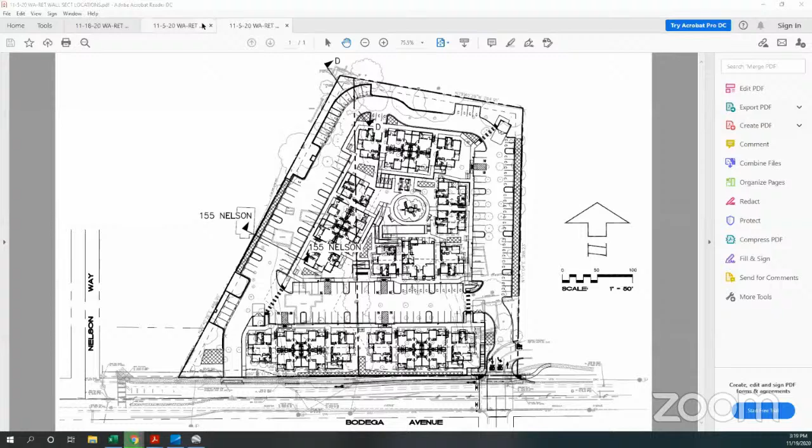Yes, okay. So the soldier pile wall is represented up here at section D, in the upper left-hand corner of the design, the northern corner. I've created this graphic that shows generally how this is constructed. You can see the dashed line at the top is the existing ground surface.

What would happen here, at this location where it says soldier pile wall with wood lagging, is a pier hole would be drilled down to whatever the design depth requires. It's drilled from the surface, no excavation at that point, just drilled straight down to the diameter of the hole, and then you put an I-beam in there.

If you go up to the plan view at the top here, those are I-beams. They look kind of like an H or an I, depending on how you look at them. Those get set into the pier hole, or pier holes in this case, there'd be multiple. Concrete is then poured up to about the location where it says top of pier concrete.

So now if you look down in the hole, you would see the I-beam and you would see the top of the concrete, yet nothing has been excavated at that point in time.

And then you start doing your excavation, and you can see where one of my engineers has thrown in phase 1 ground surface. It's just schematically, you excavate down a foot, 2 foot, whatever is comfortable, and you drop the lagging. You can see up above, this says wood lagging. It can be concrete lagging, there's different kinds, but we just use the word wood here. You slide the wood lagging into that spot.

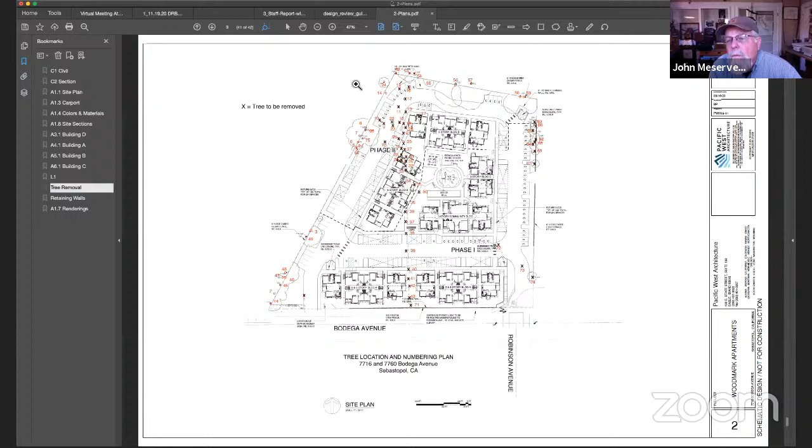So those are all trees in good condition. I didn't find any significant distress or decline. They're vital trees for the most part. We are encroaching some on drip lines, and I'm sure that's going to be a topic here before we're done. But the amount of encroachment, I think, is reasonable.

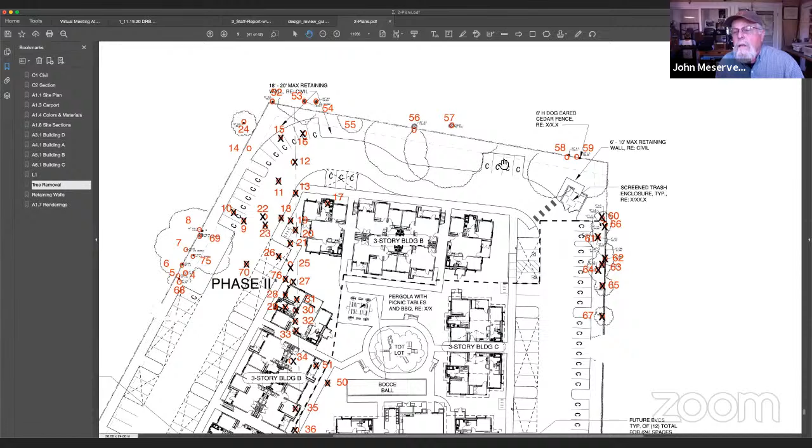I've said in some of my documentation that you might have read - on the two big trees, 56 and 57, I'm calling that a moderate impact. I don't want to downplay the fact or try to convince you there's going to be no impact, because there will be some impact, but that impact will be moderate, and moderate is very acceptable on large, healthy, vital trees. I fully expect those trees to survive and to not have a problem. I can show you examples of trees all over the county where we've impacted to that degree or greater, in Sebastopol, and trees are doing just fine. I can address anything specifically, if there's a specific tree or condition. Happy to do that. That's just a quick overview.

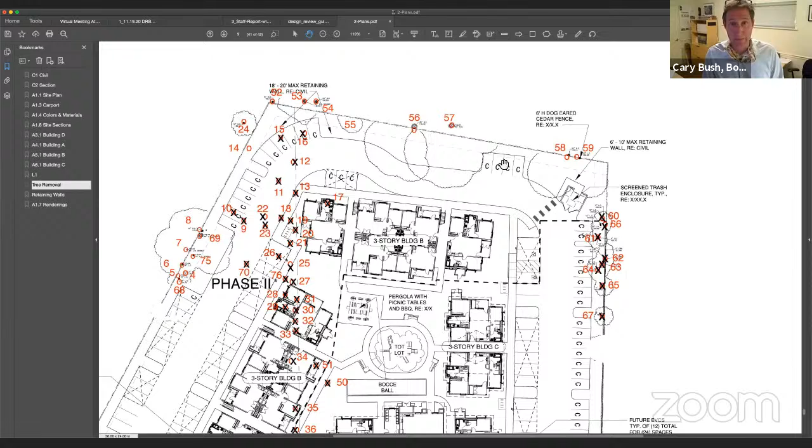That's fantastic. Just overall, just curious to hear your thoughts - 56 and 57 were significant landmarks, and we're just trying to minimize any impact because it doesn't belong to the applicant, it belongs to the neighbors. So we're just trying to understand how that soldier pile wall or retaining wall, how what impacts. No one ever knows once you start digging, but what we may expect, or what you've experienced in your career, and how this relates to the real world.

I love the soldier pile wall. I think that's the best choice there is, short of not putting a wall in at all. It really minimizes the distance from the tree to the wall. I've been fooled in the past by wall locations - they look good, but then there's, oh yeah, now we got to over-excavate for drainage, now we got to over-excavate to get a guy down in there to build a form, and you end up being 2 or 3 feet closer to the tree, which is not what we're trying to do.

So this kind of a wall really eliminates that impact behind the wall, keeps the wall as far away from the tree as possible. So I'm a big fan of soldier pile walls.

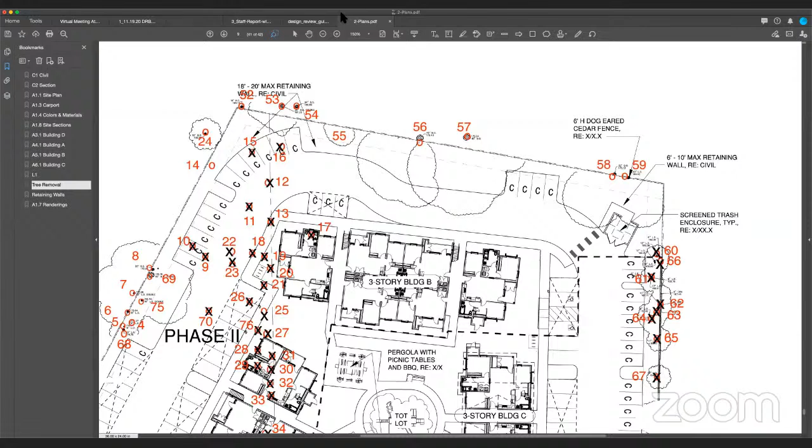In terms of my comments about moderate, I think it's important to consider what trees go through in their lives. They're not protected from the world and from impacts, from pest, disease, lightning, storms, soil conditions. If they're healthy to start with, which for the most part we have very healthy trees, they're very capable of tolerating a little bit of root loss, just like they tolerate canopy and foliage loss when we go through and prune a canopy. There really is not a lot of difference. Roots regrow just like branches regrow.

I think the critical part here is that we don't take too much canopy when we're pruning and damage the tree, and we don't take too much root system when we're excavating and damage the tree. I think we're in that category of, yes, there will be some impact, but the tree should respond just fine.

Great, thanks John. I was just curious, just to staff, is there any observation, any mitigation measures during construction as well as post-construction on the overall long-term health of the trees we're talking about here? Is that for me? I don't know, that was actually kind of more for city staff maybe to carry, if the city arborist would be still reviewing these trees long after the soldier pile walls are in, or maybe that's you John, I don't know, but I'm asking.

I'm going to insist that fencing be in place, that appropriate mulch is placed, prior to starting any work on the site, and that nothing gets behind those fences at any time for any reason. Those would be my criteria, and that should be checked regularly and periodically during the construction process to be sure that it's in place and kept in place through the duration of construction.

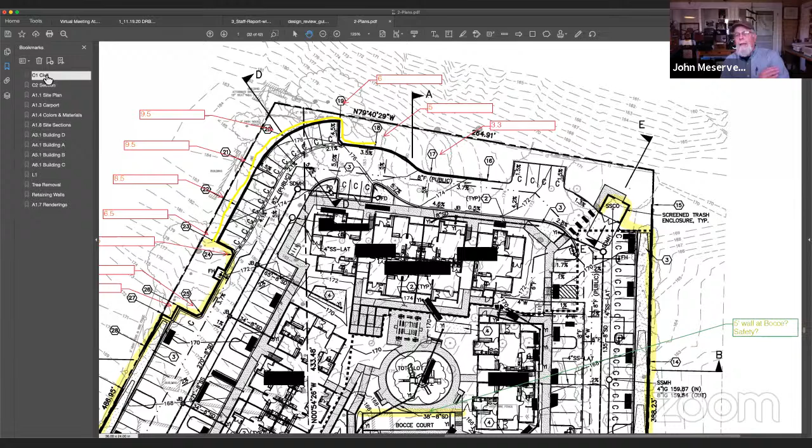Well, of course, if that's part of my assignment, my job would be to keep impacts at a very minimum. You were talking about fencing earlier—typically I see a lot more damage to trees when fences come down and contractors don't pay attention than from approved grading or improved activities near the tree. So that's absolutely critical. Fences come down quickly, so that's an issue. It's got to be in place and monitored to keep that kind of additional impact from happening, which could move from an acceptable moderate impact into something more significant and unnecessary.

Does that answer your question or fill in the blanks there, Cary? I think so. And again, certainly the project could be conditioned to require an arborist to be on site overseeing these critical issues. It could also be part of our tree protection plan. So there are multiple mechanisms to put in place, all with the goal of preventing any harm so that the situation you've articulated does not come to be.

On a slight digression, I apologize—there were a number of questions for our civil engineer at the last hearing, and I note it's 4:04 right now, and he has a hard stop at 4:30. So it's the board's pleasure as to what order they address the issues. I just wanted to point that out since there were a number of questions, and we do have Mr. Dalby available tonight.

Thank you for that reminder. Do we have any more questions for our civil engineer? Chair, if the board doesn't, I do have one at the junction between the trees and the retaining walls. From my own experience monitoring construction projects, I know there are rules of thumb about how many larger roots you can cut and still have the tree be viable. So I don't know if this is for the civil engineer or the arborist, or both—what happens if, as you're excavating down, say at the fourth or fifth board down, you find a number of significant roots? What happens to the project at that point?

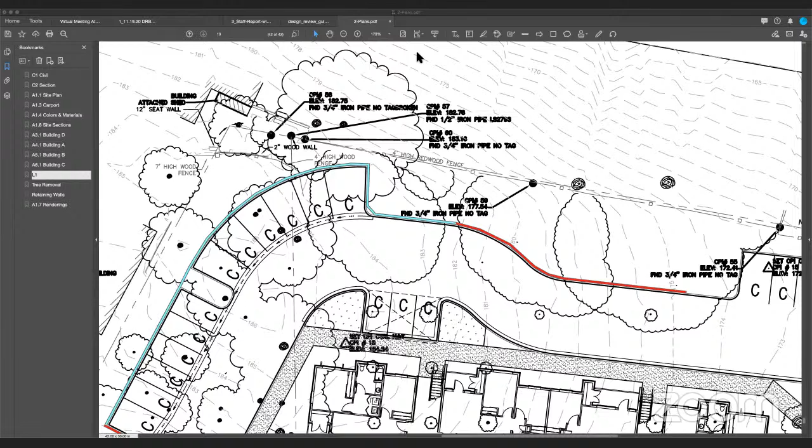Any other questions of our engineer before? Okay, Lars? Looking back at the staff report from last time, there was an overall question about the grading and terracing of the site. Staff has requested on several occasions that the applicant demonstrate why terracing the site is infeasible. Since we have a civil engineer here, we've seen the project go from more dramatic grading to less, and we've heard the explanation of accessibility as to why this is the case, but I just thought we could get the engineer's input on all of that while they're here.

This is Dennis Dalby, Civil Design Consultants. Mr. Langberg, I'll try to answer your question. Terracing the site with our latest plan, the sections shown here don't really show it too well, except section A, where you can see we are terracing the site.

We're terracing the site at the bocce court and at the upper building area. So all of those retaining walls you now see on the site are now taken away from the perimeter retaining walls shown on the plans. We are terracing as much as we can while still meeting our objectives for accessible paths of travel, maintaining 5% maximum on our contiguous sidewalks around the parking, for both parking comfort and accessibility.

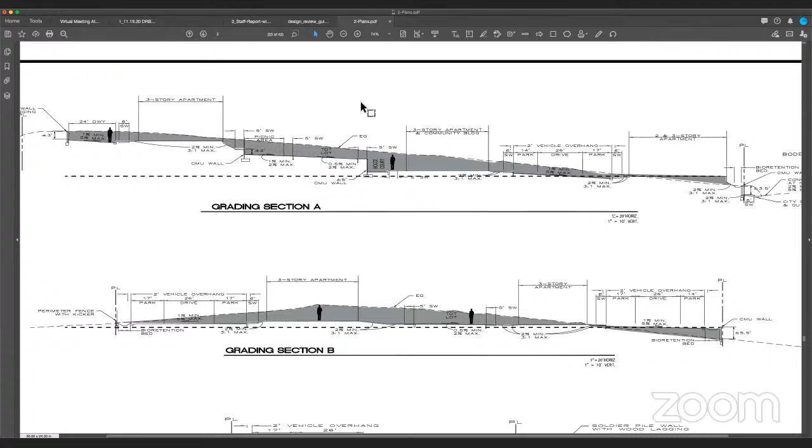Okay, thank you. So that brings up questions again, maybe more for the architect. I don't do this level of architecture myself, so the requirement for this kind of housing complex is that the whole site has to be accessible to every person via 1 in 12 ramps or less. Is that right?

That's correct, and we do have ramps where we can find room for them. Unfortunately, when you've got sidewalks and paths of travel adjacent to parking, contiguous with the curb, we can't get 1 in 12 ramps in those areas. Our 1 in 12 ramps are generally all the ramps you see interior around the top lot, the bocce court, and up to that most northerly building.

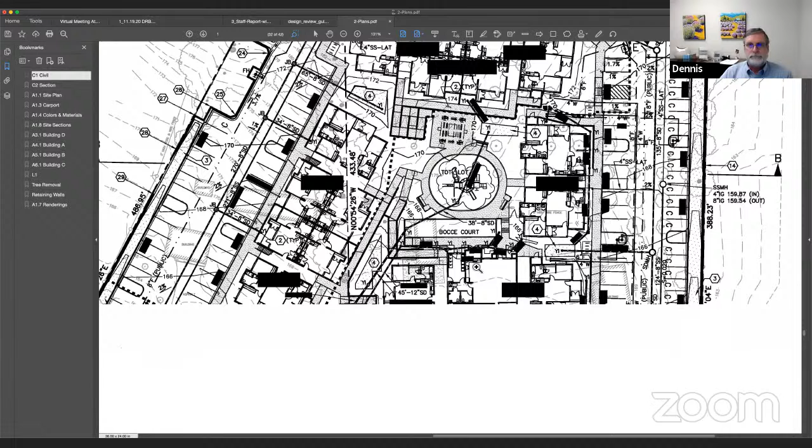Yes, that's not part of the plan, I know. Okay, thank you, Dennis. You're welcome.

All right, any other questions? Can I ask a quick question? Yeah, who is that? It's Chuck Hoffman, I made a comment at the beginning. Yeah, go ahead, I'll keep it short. Yeah, if you can make it brief.

This is very interesting to hear about the concerns about the trees. Is there a committee that considers the impact of the development on the community? I mentioned the traffic, but I'm concerned about the character of the community, given that we are being treated in an exceptionally negative way within the town, within the city.

Yeah, that is what this board does. We are the design review board, we're also the tree board, so community design and those sorts of things is in our purview. What's outside of our purview is things like zoning, densities, and those sorts of things. This board is authorized under the design review guidelines for the city, which are specific guidelines. They're the source of our authority, essentially, and you can see them online at the city's website.

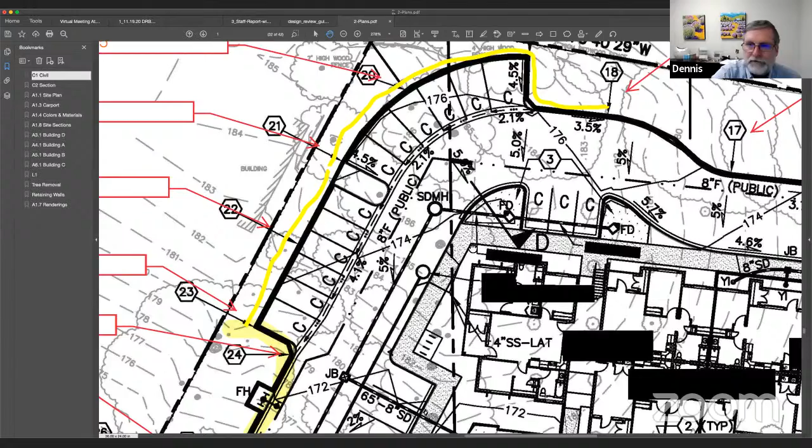So there's bioretention beds right near the planter islands, right where the lower D is on section D-D. Lower D, section D-D, let's see, B, C, D. Right, so yep, there we go, okay. So you've got a little planter island right there in between the parking. There'll be bioretention there. Anywhere you see FD, that's a field drain that drains the high flows that come into the biobeds, so we've got two right there.

There you can see the drainage pattern along the compact parking spaces heading south, and as you go south and turn the corner, there's another compact space. That little hatch pattern, the little dots you see, that's all bioretention along that property line also. Wait, which little hatch pattern? It looks like, from this screen, a dot pattern.

Not this, this is sidewalk, right? No, it's on the perimeter of the project. Oh, here, like here. Yep. And then if you go up, you'll see it along the parking spaces there by 155. Up in here. Yes, correct.

Got it, so you're draining down and then that way. Correct. Oh I see, yeah there we go. That's the correct grade. And there are other biobeds interior that are catching roof drainage and things like this near the tot lot. Correct. So if I understand correctly about this bio drainage, then there's no further drainage from that point.

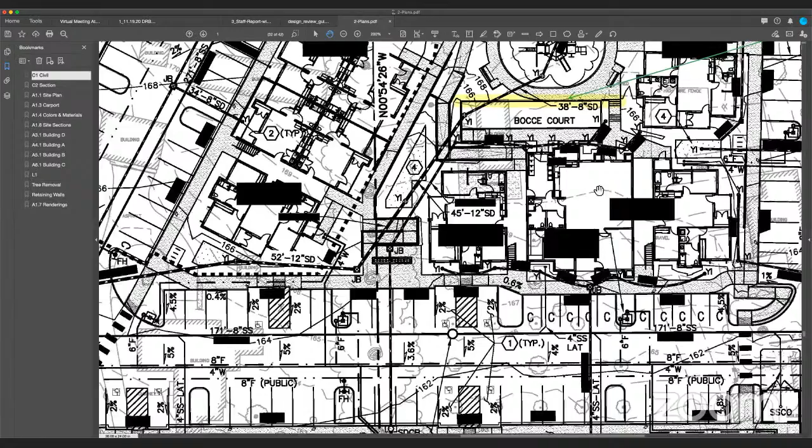That just then goes down to earth. So it's dumped in there. Yeah, so Sonoma County has regulations through the regional board where we are required to capture and treat stormwater runoff for a particular size storm.

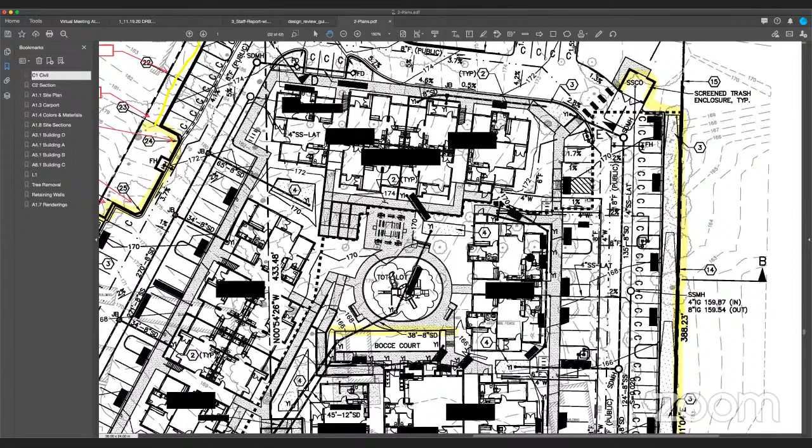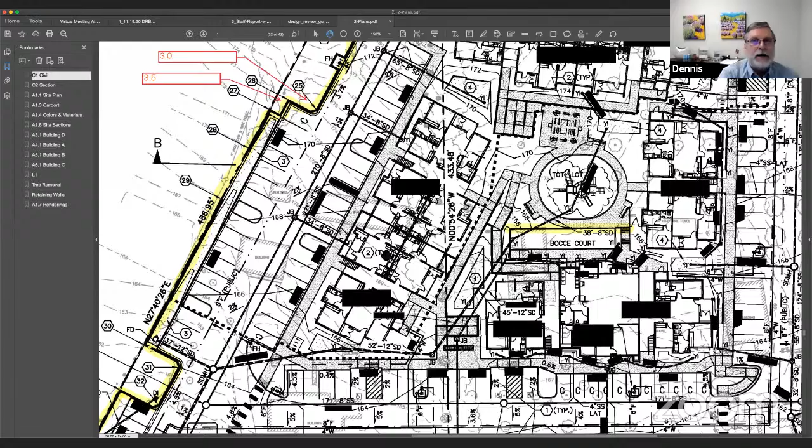It's generally considered a 2-year storm, which is about 2 inches of rainfall, so that is required to be treated and captured in these bioretention beds. The bioretention beds will percolate and recharge groundwater, and also the field drains you see in them are to catch the higher flows, because they have to work for the 10-year storm and such per the water agency.

Okay, just so I can be totally clear here. So a certain amount of the water can go into the storm drain system, and a certain amount has to be retained on the site. Is that correct thinking? Okay, so you say it would have to be captured. It would have to be treated before it went into the bioretention zone, correct?

The bioretentions are all landscape based, and that is part of the treatment. So that's considered treatment, yes, the plants. I'm just trying to understand this. So you can take the runoff water and the retaining wall runoff, whatever you have, and you can just divert it directly into the bioretention bed, and that would be considered your treated bioretention. Correct. Is that correct thinking?

Okay, yes. And then that would be expected to just basically, in those little beds there, take that water back down into the aquifer system, or down into the water table. Correct. Yeah, the real reason that we are providing volume capture is so that we limit the amount of runoff leaving the site through the storm drain pipes.

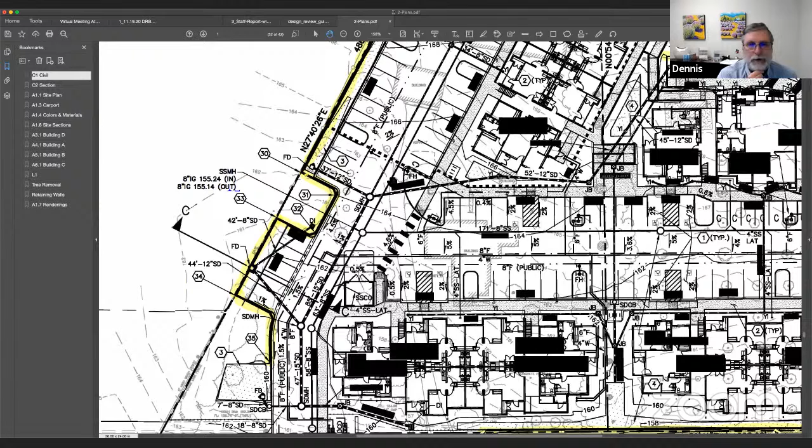Well, also you want to be able to recharge the aquifer, correct? Well, that's the bonus that comes with it. It's more about the effect of downstream outlets into creeks and rivers where degradation occurs, and that's the intent of the SWLID program. Well, it's an interesting proposition here, because right now, basically what's happening in Sonoma County, if you ask any well driller, is our water table is dropping.

And it's a serious problem. And we're taking a site here, which is currently taking all of the water back into the water table by capturing it in all that land that's there. And we're removing the capacity for it to be recaptured and sending it into the storm drain system, which is basically running out to the ocean.

So I'm just curious about these bioretentions, if that is their intent, to try to mitigate this in some way. That's not my understanding. It's about erosion, and it's about downstream waters that are prone to sediment, i.e. the laguna. It's an additional benefit that the volume capture recharges the aquifer.

Okay, thanks for the information, I appreciate it. You're welcome. Oh, and by the way, as part of this submittal, we did a preliminary stormwater mitigation plan that you all should have gotten in your package. And if you read through that, it kind of explains in a little more detail what the SWLID requirement of the state water board is.

Good stuff, yeah, I did have some questions. Yeah Ron, go ahead. Yeah, one thing, I got about 3 questions here. Some of it really has nothing to do with engineering, what we're talking about at the current stage. But one thing I do know from where I live, and Ted, you probably do too. We live about, what would you say, a quarter mile from there, Ted? Yeah, about that, yeah. Something like that, okay.

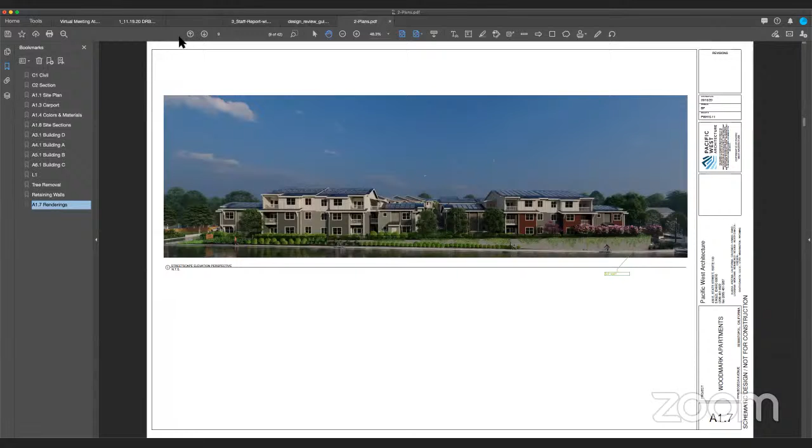Yeah, I kind of look at this a little differently, maybe, probably because of my background with Bucky years ago. I think it's been a long time, and I think Bucky had a term for this. I think he referred to it as synergy. And I think synergy, as I remember, is how this particular project affects the whole.

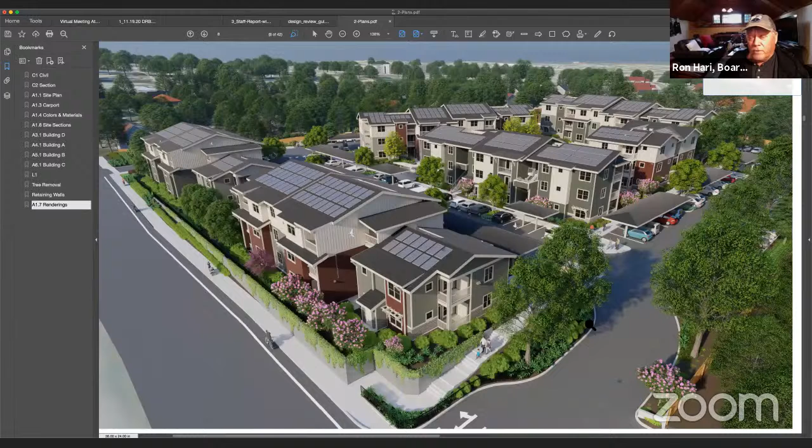And I think that's what design is about. Maybe not the design review board, but I think we're supposed to look at more than just pretty buildings. If we're just looking at pretty buildings, I'm probably in the wrong area. So that's my feeling. We haven't even talked about the buildings, like Lars said, because it's the minor part of the whole. If we approve this project or start liking it, then we will go to the buildings and see if they're pretty or not. But I think design is much larger.

There is no pure definition of what design means, except maybe in the design review board. I don't know. But this project will affect, not only during construction, but for years to come, the entire city.

And I think that's what we should be looking at, not necessarily whether it's pretty or not. That's my comment. Yeah, well, I do agree that, for me anyway, the site issues are the most significant. But I think we can also do both - review the buildings and review the site issues and talk about the traffic and all that sort of stuff at the same time.

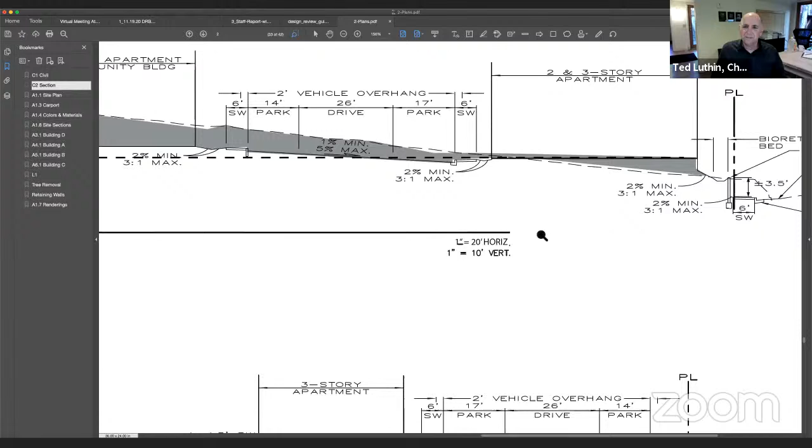So why don't we start with site issues - specifically grading, retaining, that sort of thing. I did this just because I was having trouble - these engineers that do different scales, horizontal and vertical, drive me crazy, but I couldn't get it to fit on the sheet, so I stretched it out a little bit. It's now 2-to-1, so the scale is half vertical what it is horizontal.

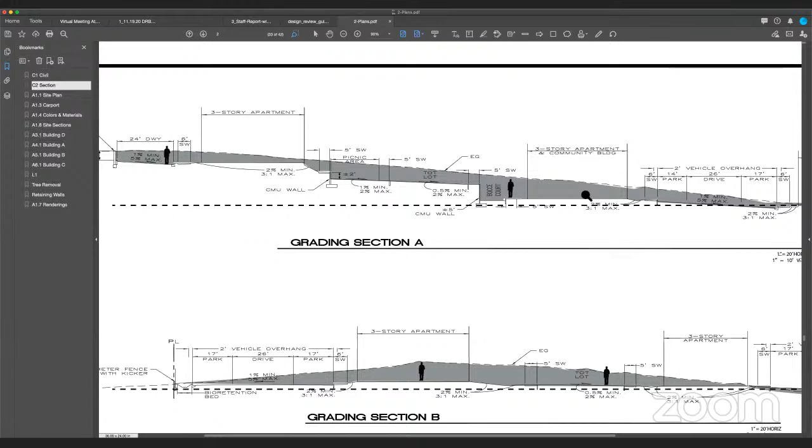But one of the things that really stuck with me is 11,000 yards of dirt leaving this site. To give a personal reference, I took a little 6-foot guy and stuck him in the cut, and then highlighted the cut so we could see what was happening front to back of this site. And it really struck me when I was out there.

When we were looking at the staking, there's this ridge that runs down the property, kind of right down here. And I was standing on that ridge, right above where this 9-foot wall was going to be, and basically probably a 10 or 11-foot cut is going to happen. I really realized that where I was standing, that cross section looked like that - I was standing up here, and the grade is actually 9-10 feet below my feet right now.

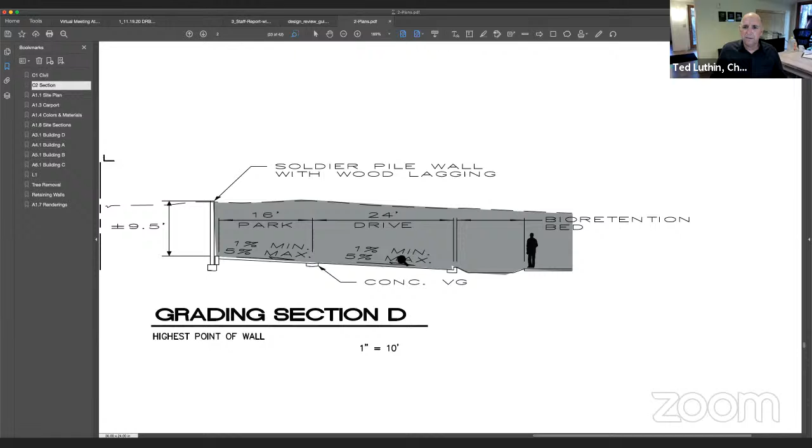And for me, that's a big deal. Side to side, that ridge is gone - it's just completely going away. So we're taking a site that looks like this from left to right, and we're flattening it out, and then sloping it back, is what we're doing, with a couple little terraces - a 2-foot terrace here and a 5-foot terrace there.

And I get the ADA access issue, but part of that stems from the design, which packs a lot onto a piece of property. So I feel like we've got the tail wagging the dog, saying we can't do it because we don't have room on the site. Well, you don't have room on the site because you pack so much stuff on it. And now the only way to make it happen is to off-haul 500 truckloads, 600 truckloads of stuff.

Chair Luthin, if I may - the traffic associated with that off-haul is also something that is under this board's purview through CEQA, but it is something that staff have already talked to the applicant about in terms of our concerns. Since there's no way of loading, you're going to be making a really tight turn. Right, and my 500 to 600 trucks - that's if you can get a big truck in there. If you can only get a little truck in there, you're talking about 1,000 truckloads leaving this site. The average truck is 10 yards, by the way. Yeah, small truck.

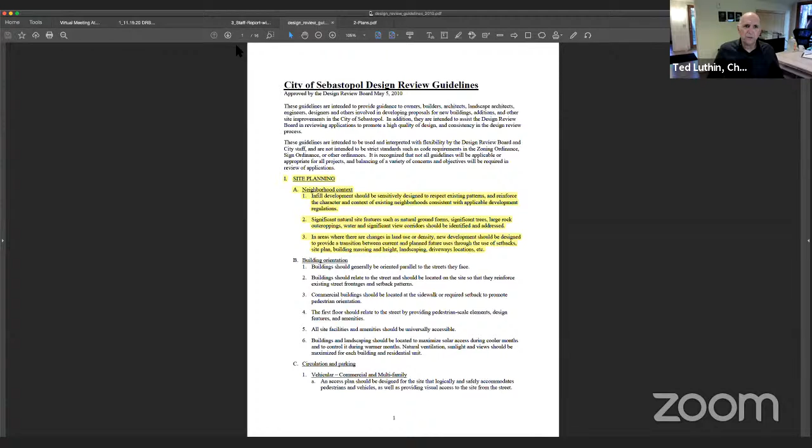And so when I look at the design review guideline that says grading should be minimized to the extent feasible to reflect existing topography and protect significant site features, including trees, we're not doing any of that. We're eliminating the topography as much as possible, getting rid of site features and all of the trees, and also potentially endangering neighbor trees. So not only are we removing almost all the trees from our site, we're also putting our neighbors' trees at a moderate level of risk.

When designing a grading plan, balancing the cut and fill is encouraged when it does not result in further adverse effects to the natural topography. Terracing should be considered as an alternative. So I think my opinion on the site and grading is that it needs to reflect item E in our design review guidelines a little bit more than it does. I don't know if anybody else has different feelings about that.

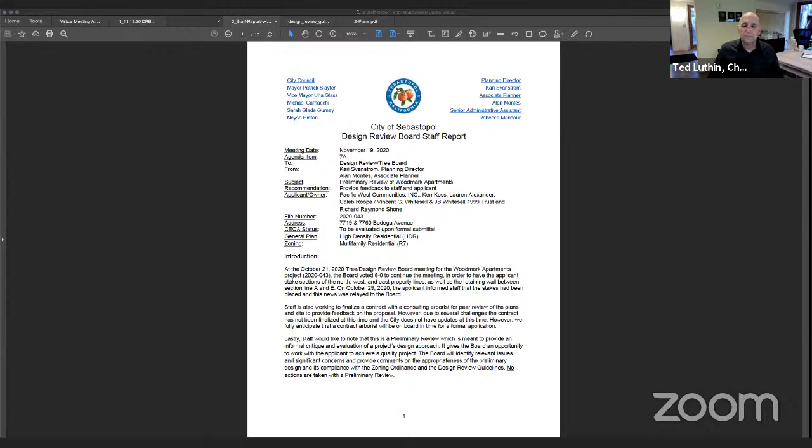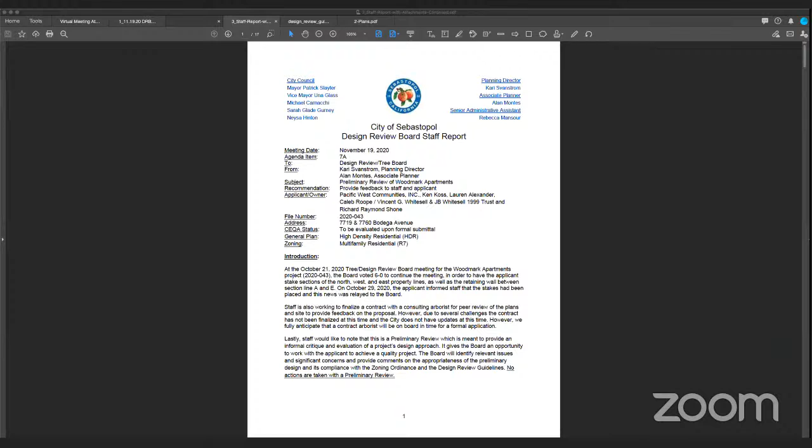I'll chime in on that, Ted. You have spoken my words exactly, and I appreciate what you did with the site plan. But their section A cut is a little bit deceptive, because if you move a little bit to the west on section A, you quickly have a much taller wall. Yeah, that section's kind of cut at the minimal.

But what we're doing here is completely destroying the natural environment. We're just taking all of the dirt out of it, down to I don't know what's going to be down at that level. It's just going to be hard Franciscan formation. You could not be more destructive of nature than this project in that location, and I'm very concerned about that. When you consider this section, it's still compressed 60%. So if you take this up 150% wider than what this drawing is, that's the actual extent of this thing. It's being compressed horizontally, so we're not really seeing the actual impact. Same thing. Correct, correct, yeah.

And we've got nature there with all the effects of nature that we have right now. We have the natural soil exposed, we have the capture of water going into the aquifer, we've got the natural trees and the wildlife, and we're taking all of that away. Because of the nature of this project, it's becoming 99% concrete, asphalt, and buildings. It's a huge heat sink. It's large enough that it's going to have a major impact on every single house around it, environmentally. It's just the wrong project for the site. I feel very strongly about that.

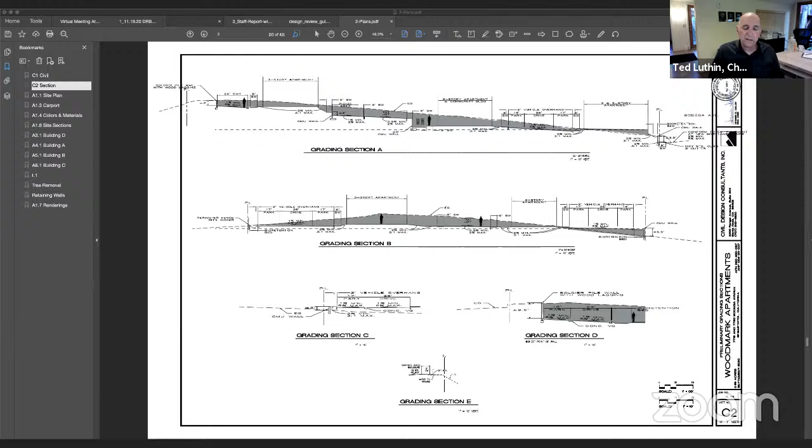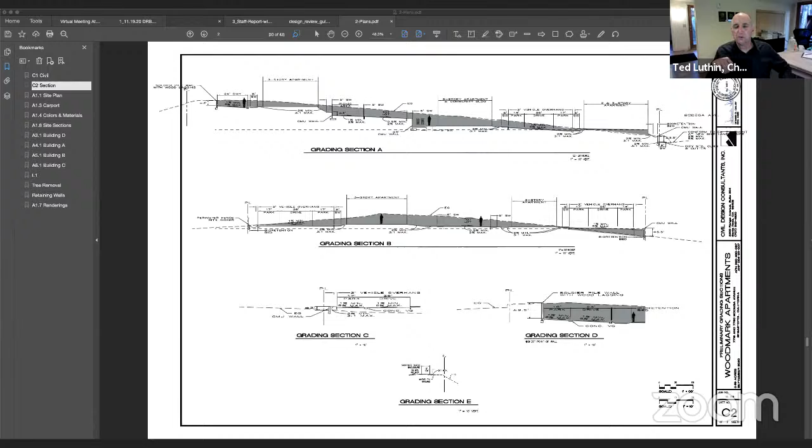Well, after I walked the site to look at the staking, the other thing I did is walk across the street to the Burbank project, which is also on a very sloped site. It's got significant change from front to back. But what you see there is buildings that are split-leveled, and a very creative approach to access. You've got 2-story buildings that are stacked units, one above the other, and they graded it so you reach the lower buildings on ramps going down, and there's a berm above, with a bridge crossing over to the upper buildings. By today's standards, that was probably built in the 70s or 80s, and I don't think what they have there is accessible. But someone took a creative approach to the slope and designed something that works with the slope, rather than just flattening it out. We're not seeing that here, that anybody took a creative architectural approach to designing something that works with the topography.

Well, let me ask this question, for Lars, if I could just cut in for a second. Lars, could you provide accessibility on a site by using lifts, so you don't have to ramp? Like, would that qualify as accessibility if you terrace, but also provide a lift system, like an elevator, where you can get up? Would that qualify as accessible?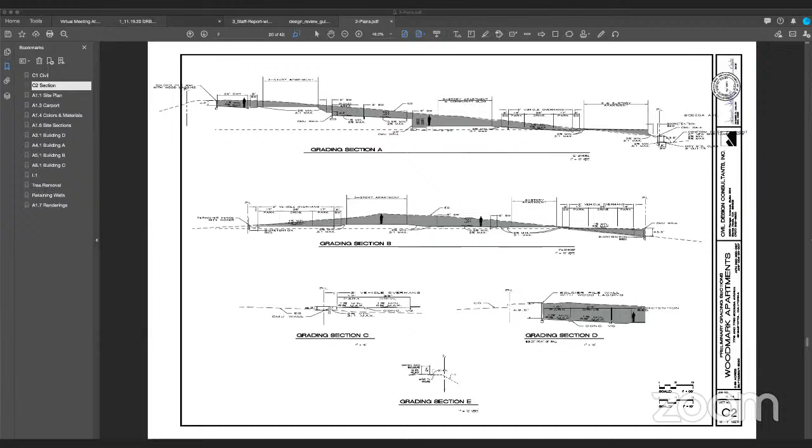Sure, elevators are accessible, but they don't go horizontally, so you can't access every part of the site that way. What I'm saying is if you had a terraced wall and an elevator instead of a ramp system to get up, like they have at Hop Monk, there probably would be a way to do it, but I'm not sure if it would satisfy the whole site. The whole site has to be accessible.

So I think to say that they haven't been creative with grading here, I don't agree with entirely, because they're trying to fit 86 units onto the site. I think they've actually come a lot further and been more creative than before. But to get that many units on this property fully accessible, maybe they can't be more creative.

That's very possible, that maybe we've reached the limit of what's even possible in terms of getting this many units, this many parking spaces, fire access and all that sort of stuff to work on this site. And I agree, I think the creativity has been in the site work, in burying the wall above the bocce ball court and doing some of that ramping. So I don't mean to discount that, because I actually think a tremendous amount of work has gone into getting the accessibility to work.

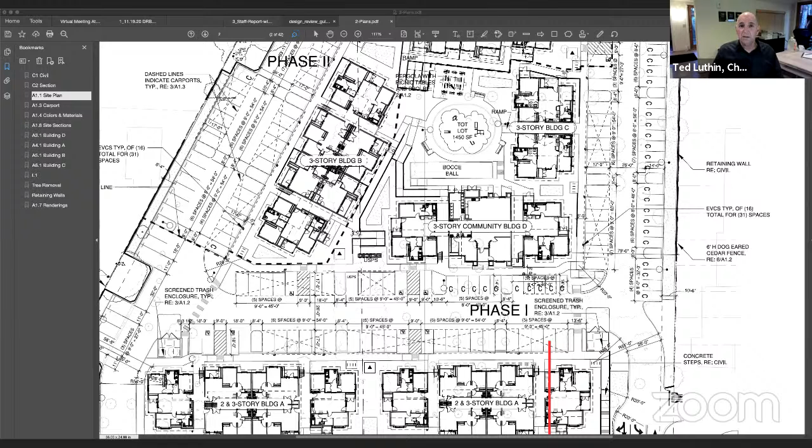Trees, what is it, 56 or 57, or two of those big, huge trees back on the property there, on the neighboring property. Those are huge old trees, and I don't feel comfortable accepting a moderate level of risk to those trees. I don't know how the rest of the board feels about it, but I feel like there must be something that can be done to this back wall, this back part of the property, to where very little or no retaining is needed, and we get out of the moderate risk zone of those trees.

I think very possibly those trees, as well as some of the old oaks in Sebastopol, are what you would call old growth. I'm pretty familiar with this, being from Armstrong. I think there's a good possibility those were not planted. I don't know what the native trees were here. I asked the local arborist, and she didn't really know. Of course, this was called, what was it? Not Lone Pine, what was the name of this place originally? I'm losing it here, but I have a feeling some of those old trees are referred to as old growth or native, not planted. Everything on this lot, I would say, has been planted. There's a big difference there.

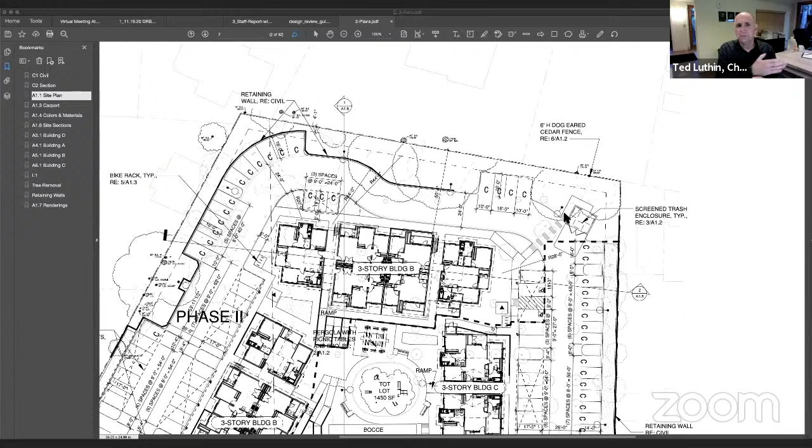Any comments? Yeah, I think you're right. I think we went through a zoning period of time where we, for some strange reason, increased density as we moved away from downtowns, which was kind of odd. We went, okay, now what do we do? We do the downtown, and then we do single family homes, and then we do high density houses. What are you doing? This is a little bit of a remnant of that, I think. And you combine that with highway corridors, and I think that's kind of how it came to be.

You know, I'm not sure about that, Ted. I think this parcel was rezoned as part of the general plan update that was just recently done. Oh, was it? Okay.

So I can confirm, this has actually been zoned R7 for quite a while, for at least the last general plan, which was 94, I think. Going back, we got a question before the applicant had even submitted, just when it was for sale. And I can clarify, yes, you can't spot zone, you can't down zone under state law when you're talking about residential zoning, unless you're up zoning another part and not having a no net loss, but you can't down zone, in particular with spot zoning, and that is illegal.

This corridor was zoned because it is a highway, it is a major thoroughfare, it is a place where there is transit, which will grow over time. But Kari, you said that when it was, the city sort of looked at that and considered half as many units on here when they were identifying this parcel.

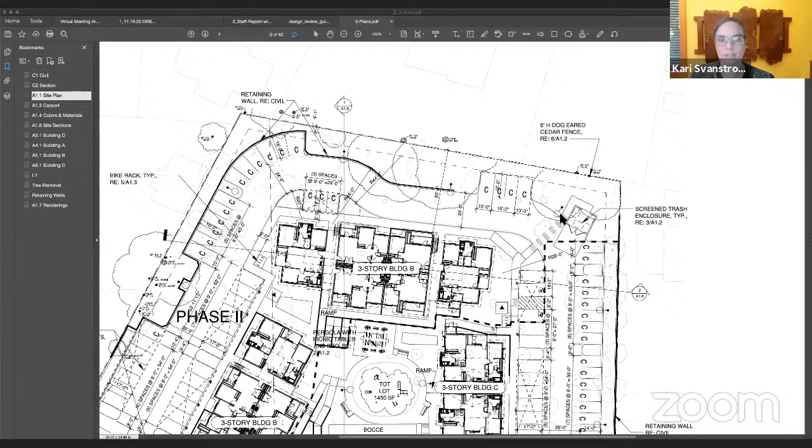Yeah, so for our housing element, we're required to identify sites that could accommodate housing, whether it's a vacant single family lot, which can be identified as a housing site because it's available and appropriate for development. You need to identify the number of sites that is the same as the 8-year regional housing need number that you're allocated by the state and the regional government. And so this one, in our last housing element, I don't know if it dates back to a prior housing element, but certainly in our current housing element, it was identified. In general, they did go through and do site analysis of what's appropriate, what's viable. The triangular lot was not included, but the rectangular one was.

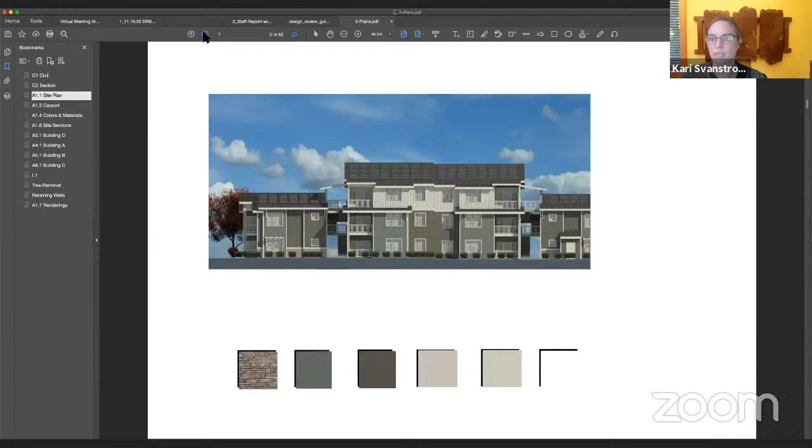And normally there's a formula applied that looked at a certain percentage. Not everything was expected to be developed at 100% of the maximum density, because a lot of developers don't want to do that. They want to do something—we have another site where someone wants to keep the existing house and then build around it, and they won't meet the maximum density. It still needs to meet the minimum density. But for this site, I believe it was sort of an 80% of the density that's allowed for the rectangular site that was identified, and I think it was like 38 or 40 units.

Actually, something else I picked up from Paul, and see if you agree with this, Kari. He said that if we were able to rezone that, the city would be liable for the difference in the value of the property, and the city would have to pay the owner the difference, because the property wouldn't be worth as much on a lower zoning rate. Well, I would need to consult an attorney on that. I'm not sure how that works, but I do know under state law, you cannot down zone. You cannot reduce the density of housing, of sites that are zoned for housing. So I think that's maybe a dead horse. It's not legal. We can't do it.

We need to work with the site as it is. And I might suggest inviting conversation with the developer to see if there's some way of moving the project forward in the direction that the board has been talking about in terms of the issues.

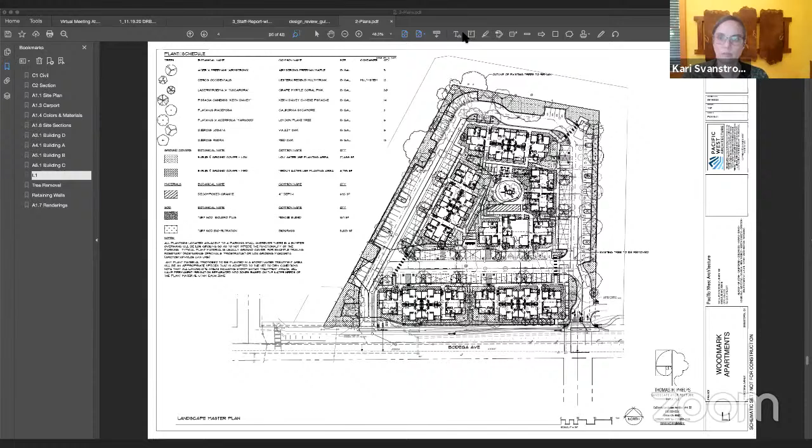Another thing I asked him, frankly, what does high density mean? And what Paul told me, according to Sebastopol or whatever, is that high density means somewhere between 12 per acre on the low end, and somewhere near 25 is the maximum. But he said that no developer would touch anything on the low end because they couldn't make any money on it. Is that correct?

I'm not going to comment on that, Ron. I think people have all sorts of different motivations for doing what they're doing, and there's a lot of different economic models out there. Is the 12 and the 25 correct? Oh sorry, I'm not an economist, so don't ask me that. I believe for us that is our range for the R7 zoning, which is our high density zoning, which is what this property is zoned for. So that number is correct? Is that what you said? I believe so, yeah. Okay, thank you, that's what I wanted to know.

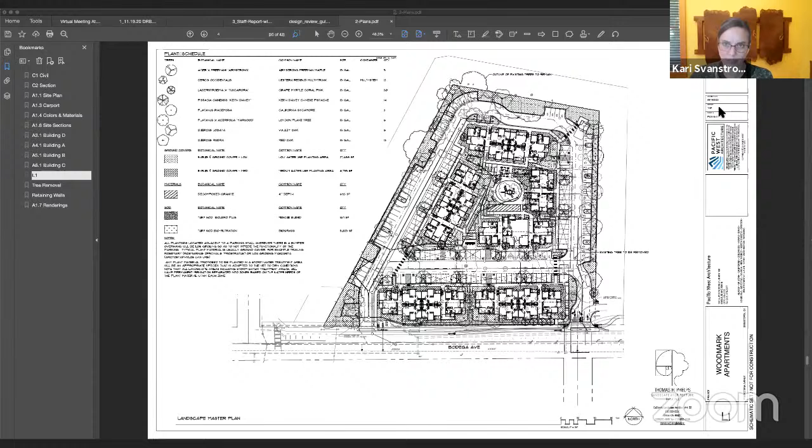Yeah, and I believe the 84 units is a few units less than what they could actually do under the regular zoning, as we discussed. And they're not asking for the density bonus of units either, which would be a greater number.

Okay, so we were talking about trees. Carrie, any thoughts on trees, since you're our plant tree specialist?

Thanks, Ted. Well, yeah, we all talked about the macro being what zoning allows. We just talked about that, and it's been tough. It's a really tough position for this board, my fellow members here, to talk about what we're reviewing for the zoning allowance from what is actually written as a design review guideline. I went through the 16 pages of design review guidelines again, just to reiterate that it's hard. This isn't going to fit. And to quote you, shoehorning into not enough space is a good analogy.

And the significant, I guess the overall significant impact is going to be on the trees, the ones that are really even not on site or the ones that are of value. And so no one can predict when a tree will fail, but to increase any or impose any new impacts on what is nature is always a risk. And everyone has to recognize that. That's the elephant in the room.

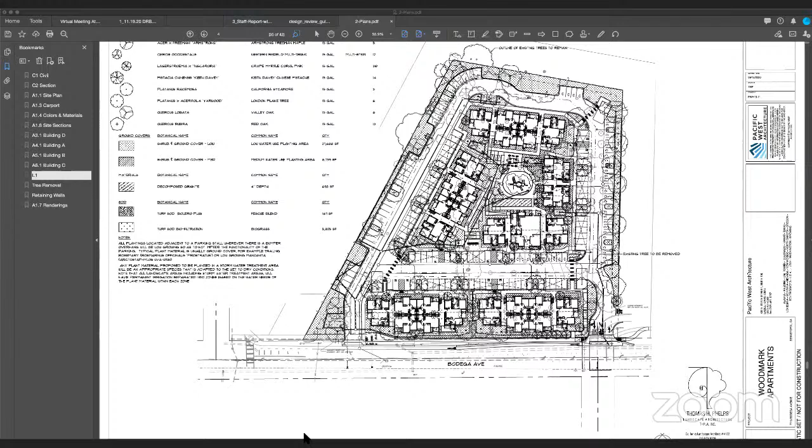So, yeah, the trees, I think the report's been really well written. John Meserve is well respected, and his report is very well documented. And I expect we're just trying to fit too much on a site. And the trees will be, they're going to be at risk, put it that way. And that's going to be the indicator. So I really appreciate your studies, the level of work you put into these exhibits that we have before us is great.

I also feel that, my words before about the project itself and its orientation is clunky. And it goes right back to that northwest corner, which is actually the area that's probably most disputed, if you want to say that. So there's some design work to go back to, I think, in order to make certain things really work.

But I mean, if we really had to look at the bigger picture, which I went to use the word macro, it comes back to neighborhood context. While zoning allows it, but we got guidelines to follow, and does it really meet the neighborhood context? That's a tough one to answer as a design review board member. I mean, that's what really makes me think hard about these projects, and it's killing me. So there, I'll leave that on trees.

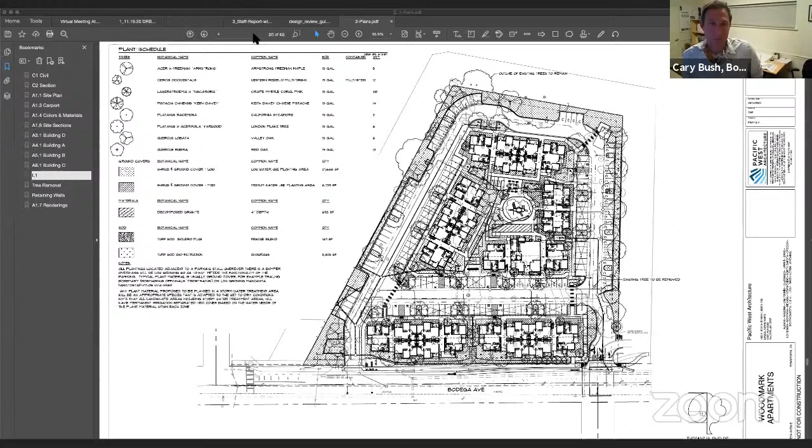We talked about grading and drainage. You did design context, access for pedestrians. Maybe that's where we can go back to, because we've already kind of beat our drum on the whole bigger picture. Yeah. All right, why don't we talk about pedestrian access?

Something that struck me because I did the exact same thing here. I went back to my design review guidelines. Pedestrian access: in general, pedestrian circulation should take precedence over vehicular circulation. Provide pedestrian accessibility to the street and adjacent uses using pathways, gates, pedestrian walkways, crossings, etc., and pedestrian access which is separate from driveways.

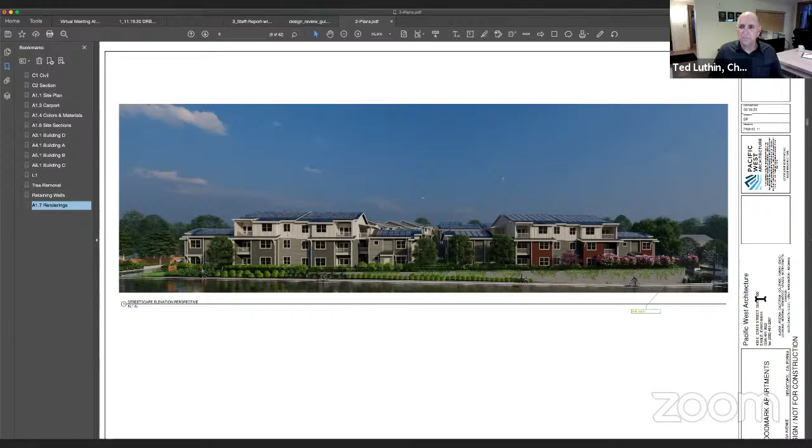And I know that was talking a lot about single-family homes, and that's what we've kind of used that for in a lot of cases. But one of the things that really struck me about this view of the property and really about the site plan is that the front door of this thing is purely vehicular. And I know that most of the people are going to arrive and depart in cars. But there really isn't even a sort of a symbolic gesture to the pedestrian. We've got a continuous wall that becomes a continuous fence.

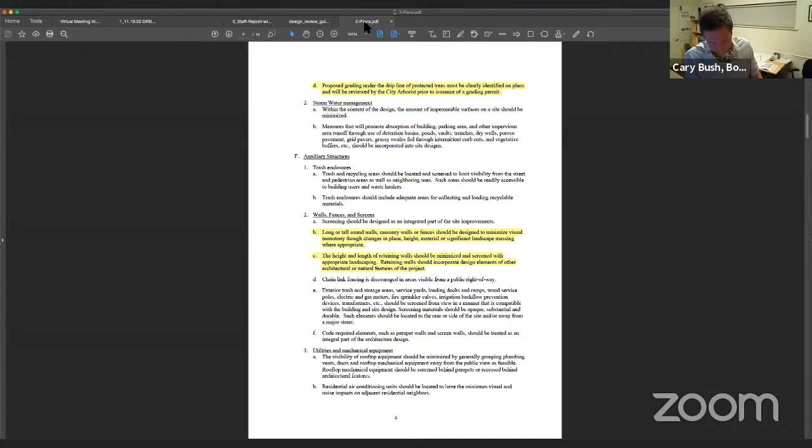And there's also a design review guideline related to that, that jumped out at me, that said long or tall sound walls, masonry walls, or fences should be designed to minimize visual monotony. When I look at that, I see, from a pedestrian standpoint—I know that this is exaggerated, that this wall really isn't this tall, at least that's what the grading plan says. So if it's to be trusted, then this is only a 4 or 5 foot wall.

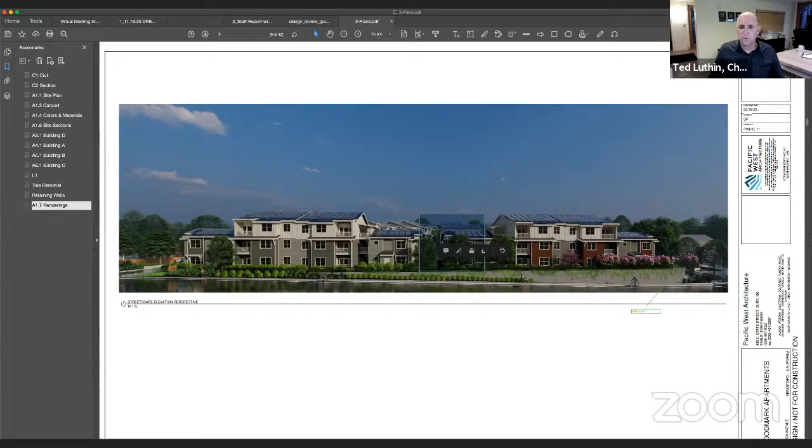But still, from a pedestrian standpoint, you're walking along this wall and now you're walking along this fence and there's not a break in it. There's no gesture in the middle for signaling an entry point that is separate from a driveway. Really, the pedestrian access point is this sort of ramp that becomes a staircase over here, and it's right next to the driveway. What makes you say that's not in the rendering? You don't think that's accurate? I mean, I understand why grading drawings are done that way to fit on a sheet, but why wouldn't this be?

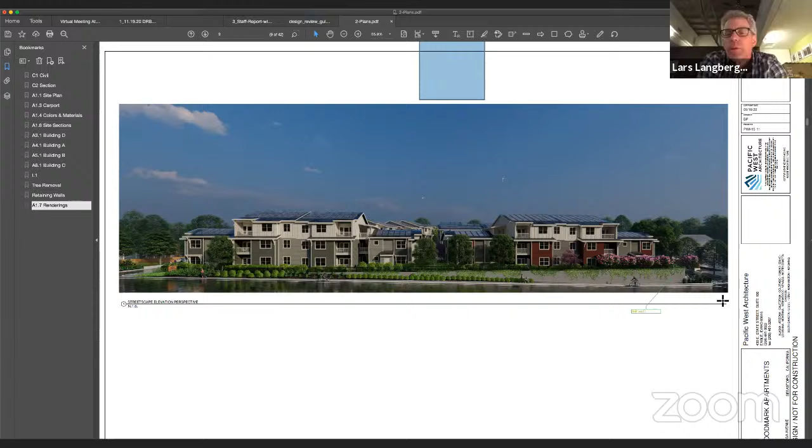Well, I guess the civil drawing tells me that wall isn't that tall. I'm not sure which to believe because usually the model's rendered from a civil base, but that's wall 8 right there, and wall 8 says that it's, I think, 5 feet tall. Kind of a stepped condition. I think there's a double wall there with a planting in between.

Oh, maybe so. I think the rendering may not show that, but yeah, that's all very well said. I think they brought the building up to the street, which it wasn't before, which is part of our guidelines. And I think that conceptually that works, but then it's up on this high plinth, and there's no breaks in it.

I think you have multifamily development that also has front porches and walkways to the front door from the street. I used to be on the board in Cotati. There's a whole mess of developments there that are like that. So it can work even in a big development, but not when this is the grading condition.

And we have a guideline that says you should access the front door from the street. To me, I don't think everyone has to do that, every unit, but it should be welcoming to the street. And this totally feels like you're encouraged to go up the back, or you'll arrive by car, or you're going to walk up the driveway, and find the entry somewhere on the back side. And it just has no, the breaks along the way would be so helpful, to have some stairs, tight stairs going right up the middle or a couple places.

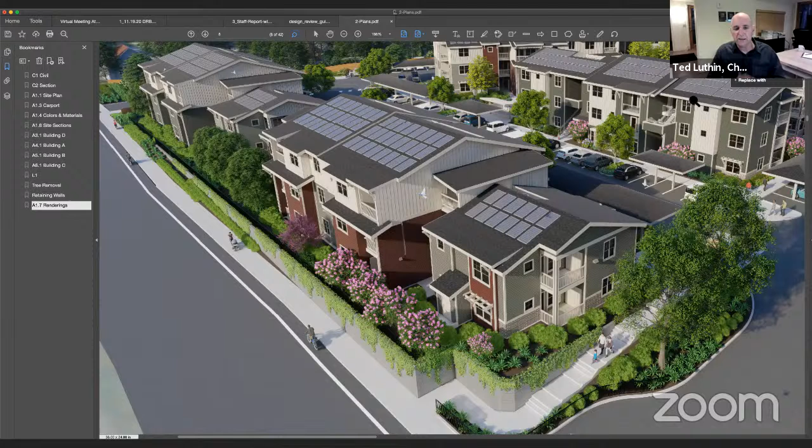It's another example. I walked through that again, revisited it after I went up to Burbank, and I kind of walked away going, okay, someone took a really creative approach to a kind of a challenging site. It had a big grade change from the street, it had to interface with a single family neighborhood, and it does it pretty successfully.

Yeah, I could comment on that. I'm glad you brought up the Petaluma Avenue homes, because I feel like that's a unique project for that site. Like somebody attempted to design around the site a little bit.

This project here, I've seen this. Like I said, my son lives in this apartment complex in Newberg, Oregon. I mean, it's just more of a standard. It's not considering the site. It's just carve it out flat and put it in there. And I think that there can be creative solutions, Petaluma Avenue homes being a really great example, actually.

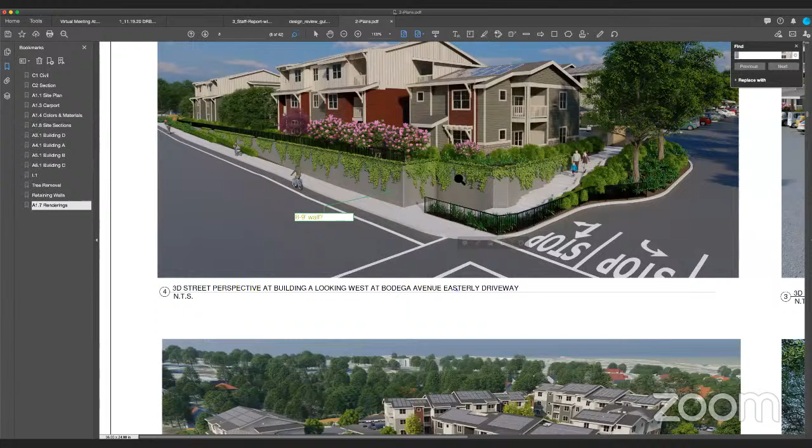Yeah, and I think this condition, and the inability to transition up here, and needing this retaining wall, again speaks to the elephant in the room, which is, well, it had to be there because we had to pack this much stuff onto the site. So this building had to get shoved all the way down as close to Bodega as we could possibly get it to get a 2-to-1 slope down to a reasonably sized retaining wall. So this edge and that edge and the retaining down this side, it's just all around this whole project. You keep seeing that, you keep bumping into that, going, wow, really?

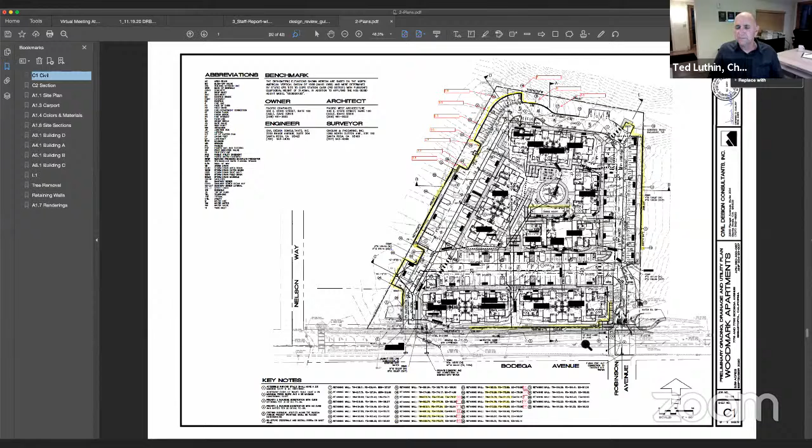Yeah, I think it's trying. It's trying, but it's trying hard. It's trying, that's it.

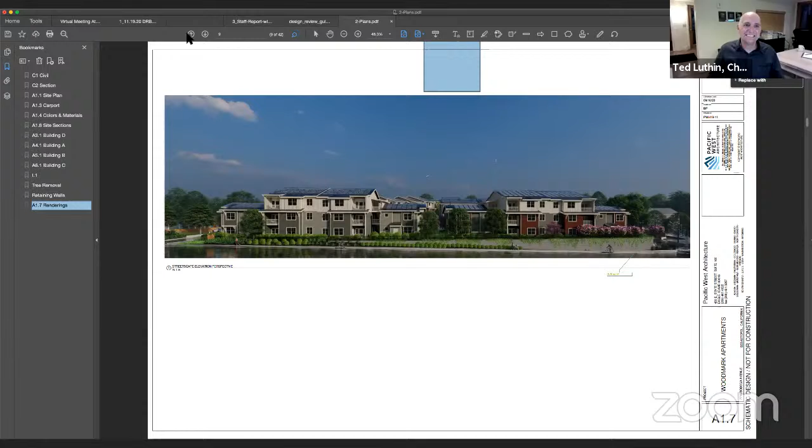Well, I think it gets back to the idea. I mean, I wish whoever was designating this when the plan was being made about the high density, because it wasn't thought through obviously at that point. But what this applicant is doing is really what he needs to do. Yeah, it just doesn't work on this site.

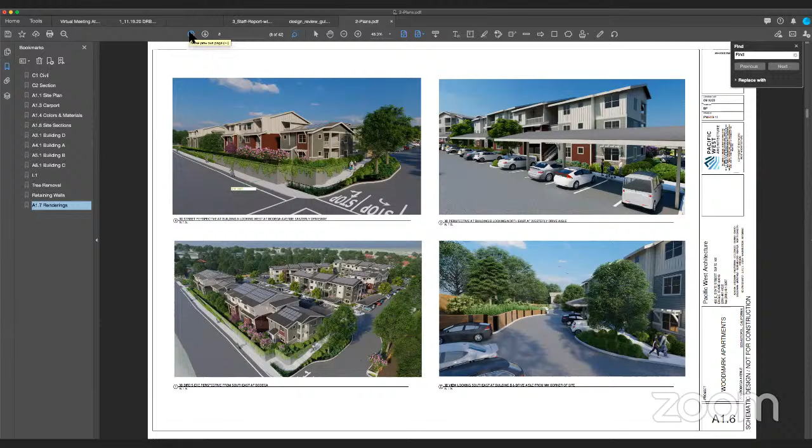If the site's too sloped, the impact on neighboring properties is huge, and we must consider that. We've got one guy in the northwest corner whose house wall is 15 feet from a 9-foot retaining wall.

15 feet. So back to that comment, Christine, didn't we make an initial suggestion that we wouldn't want to see walls higher than 4 or 5 feet? I said 4 feet. I don't know how you make it work on this.

That's why I was asking if you could do terracing, some kind of a lift or something to get around the ADA requirements. I just don't know. But the problem is you have to look at every single property that surrounds this, because of the proximity of this grading to their buildings.

I went over and looked at the Bear Meadows buildings on that side, and there's a big wall up high. They go out their backyard, and there's a big wall up high. If you look at the design standard that talks about detriment to the value of neighboring properties, here we are.

But if it could somehow be terraced, I don't know if that's possible with the ADA standards and the other requirements and the number of units they need to get onto - that's outside the purview. But yeah, this is an issue.

I've seen their projects. There's one, I believe it's over on Santa Rosa Avenue on the flat lot, and it's a nice little project. It's these same buildings, the same formula, but on the flat lot, and it works.

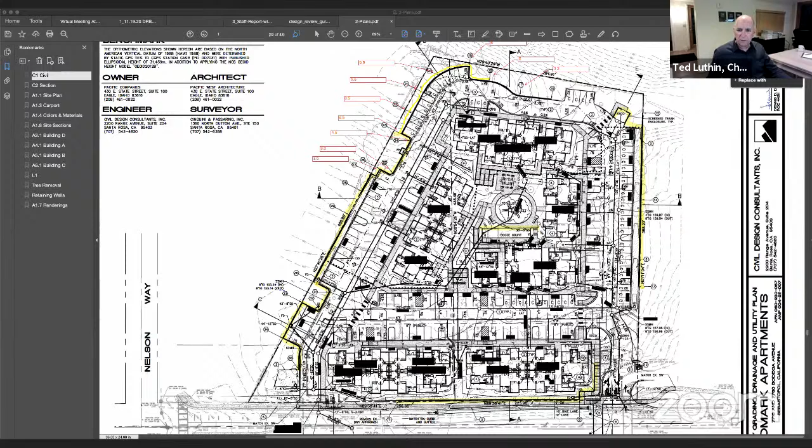Well, something else - as I was walking up there the other day, I can bring a photo of this up. Thinking about 3 stories, and neighboring right here, that's a 3-story building. That doesn't bother me. It's set back from the street a little more than what we're talking about, but the buildings along Bodega were 3 stories. I guess what I'm saying is, in terms of number of stories, 3 doesn't bother me, especially out along Bodega.

And internal to the site, if we allowed some of these centralized buildings, 1 or 2 of them to go 4 stories, and that eliminated 1 building, yeah, I'd be for that, I think. And Carrie, to your point, if that back building was eliminated, the amount of runoff would probably be significantly reduced now.

Right. I kind of looked at it as a designer and site designer - all those compact stalls in that little quarter round back there, and even the 3 compact stalls closer to the building, those 14-foot deep stalls, those are a waste of space. You lose those, you can drop the whole parking segment down, so you don't have this weird little swoop of curve that cuts into that bank and becomes foreshortened. So to me, you lose those 3 goofy compact stalls right there. Yeah, and that corner becomes a lot cleaner, probably even better for fire.

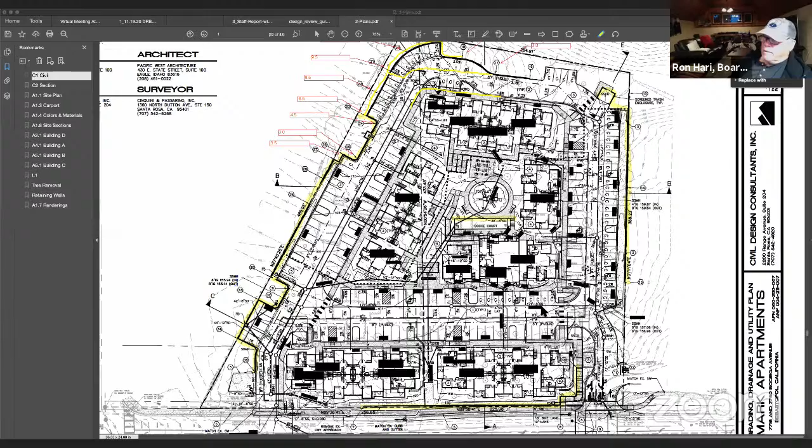To remove that rear building entirely would be a game changer, I think. Actually, can I say another thought here? Ted, you had a photograph of, I guess you call that Bear Meadow, whatever that apartment complex is - the three-story houses, as I remember, I know somebody there. I think most of the first story are garages.

So they're not really living spaces. Now, if we went to a 4-story or even a 3-story next door, what is the possibility of making parking underneath the houses themselves? That would eliminate a lot of just parking spaces, and they could park underneath the structure itself - similar, maybe not a garage, but open parking underneath the building itself. That would free up a hell of a lot of space. Is that a possibility?

If you go up in the housing in the buildings, you got to put the unit somewhere. Yeah, you'd give up a unit for a garage, or part of a unit for a garage. But if you went 4 stories compared to 2 or 3, you'd gain there. I think Ron makes an interesting suggestion here - if we move some of that hardscape away so we could have more green, and took that parking underneath the buildings and possibly increase the height of the building, so the 3-story buildings become 4-story, but the parking moves underneath.

Right. Now, I don't know if that - I agree with Carrie, I think eliminating that back building is a game changer, but where do you replace those units? Yeah, is it cost effective or such? Yeah, right. Well, I mean, can those units be replaced elsewhere? I don't know off the top of my head. Can they be added to a 4-story building?

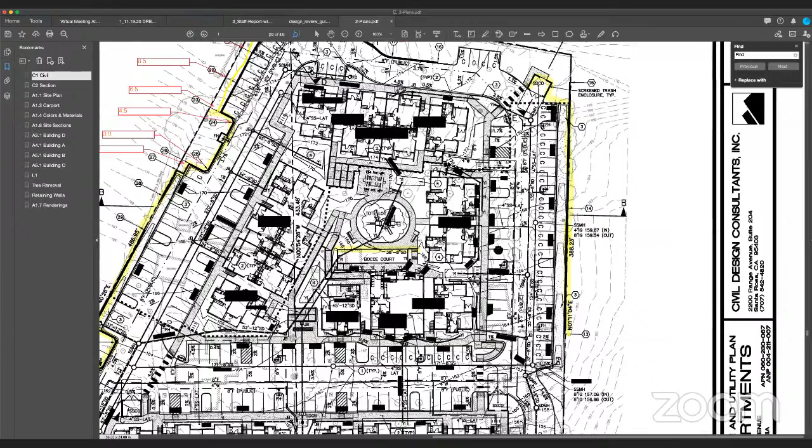Yeah, well, it sounds like we're all in agreement that if the core of this thing becomes more dense in exchange for having more land left exposed, we're in favor of that.

And Chair Luthin, I don't know if you want to invite the applicant, since it's a preliminary review and there can be a little back and forth, to see if they have any reactions to that. I know they are obviously most familiar with the site. Yeah, sure. Anyone from the applicant team have anything to say?

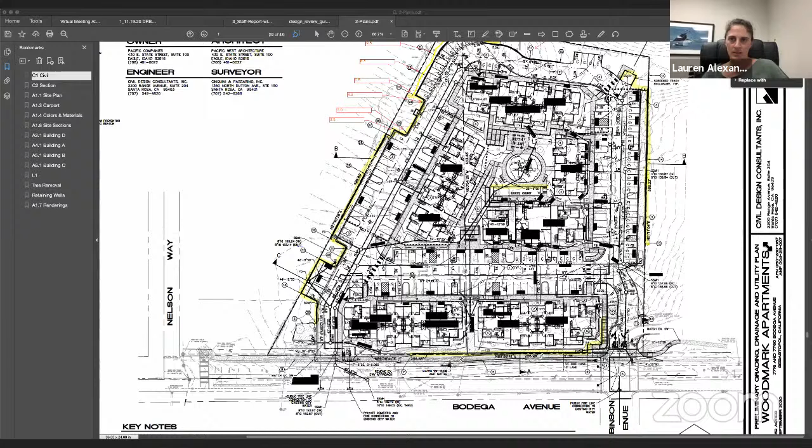Are we crazy? Is this something that you've studied? I think our architect of record is on, but he may be turning on his—oh, there I see him. Doug, do you want to step in and comment on these suggestions? Yeah, sure. We can do anything with an unlimited budget.

I definitely appreciate speculative planning, and yes, we can do a central building with tuck-under parking, 4-story. More than likely we'd end up having to go with an elevator, which is about $100,000, plus additional structural requirements and seismic considerations we'd have to make by losing that back building and consolidating. It's a redesign, and for the record, the project down the road in Santa Rosa is a different footprint and prototype.

So this development has a unique design. All of the unit plans, the building footprints, exterior elevations, and programmatic elements are all specific to this project. So by changing the overall program, it would be anywhere from 2 to 3 months in redesign time at this point. So I'm not saying that we can't do it—I just want to make sure that I advocate for a reasonable approach.

And as part of that, I would request that we get the speculation in writing from the board. And if I'm going to be designing to a specific program, and now I have 2 masters, I'm going to request that the board provide written, specific instructions on how to meet the performance requirements of their design package, because that would be critical for us to hit it the first time and not have another continuance and additional time.

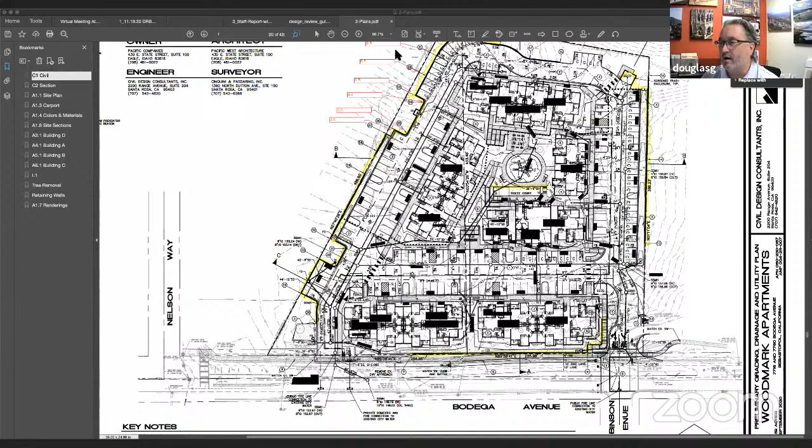So respectfully, if that's the sort of direction and speculation the board wants to provide, I would just need something a little bit more concrete as a programming element that I can then meet with the client about so we can all wrap our heads around these things. Please also note that we have done schematic review internally to know what it would look like if we tried to take the same density and put it onto the footprint. We can make those types of changes and modifications work. It's just that nexus of feasibility for the project financially. And if it gets to the point where we're looking at significant upgrades because of seismic considerations and lateral forces, then it's not a feasible project. So I just want to make sure I'm upfront with the board about that.

Have you done? I'd like to make a comment about the view possibility she was talking about. The houses in the rear of the property, the main focus of what we're talking about, are below the property line. There's quite a drop between that property line and their house, so there's a berm there which visually means you really can't see much of the property from the backyard. Yes, they will probably see the top of four-story buildings, but everything is about compromises, and they would probably accept that to save their trees and have a green belt there as opposed to a house closer to them. But all the ones on Nelson Way are facing the other way. None of these properties are what you would call view property, even though it is on a hill.

So that's my guess. I don't think anybody's going to be happy with everything anyway, so it's a compromise. To the cost issue, the cost of all the grading and retaining, if you save some there, maybe then it offsets some of the additional building costs.

Just in general, Douglas, have you done affordable projects of this nature at 4 stories? Do they just work in general?

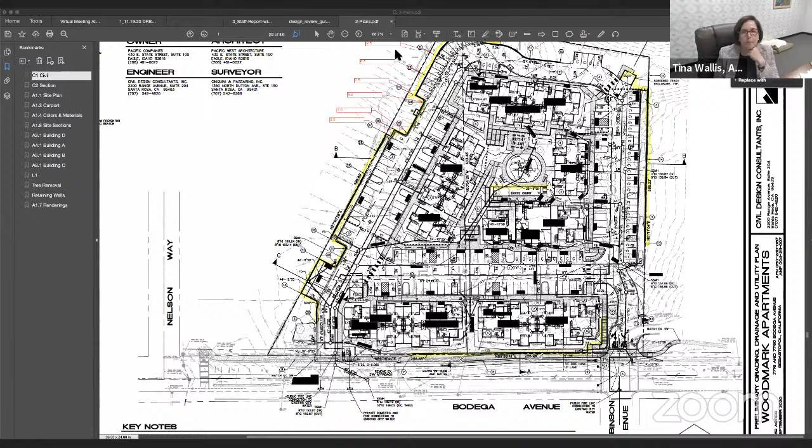I think it takes obviously time to consider these things and to study them, so that we can really put our best foot forward and put our best effort into looking at them. So we don't have any substantive responses now. We've all taken copious notes, and I believe we'll have the luxury of having the ability to rewatch this hearing if we've been confused about any of these comments. So we have heard the feedback on these things. We do appreciate the feedback, and we will certainly give them due consideration. But we would like to do that again in a measured, thoughtful way where we can really think carefully and analyze things carefully. Fair enough.

Okay, I'd like to add in one more comment here. Sure, go, while we're talking about this. So we still have the issue of parking, and that's a big, big concern and very real concern for the neighbors. Let's hit that.

The parking spots, there's only an average of 2 parking spaces per unit, and then you have to take out the ADA spaces—those don't count, they're only for ADA. So in the real world, people are going to be parking on those neighborhood streets, and that's going to be a big impact on the neighbors. I drove up those streets and they're already kind of parked out.

So I'm just putting that out there, because realistically that's what's going to happen. In today's auto-driven world, 2 parking spaces per unit is actually less than that, probably more like 1.6 when you take out the designated ones. That's not realistic for number of parking spaces, and yet it's hard to imagine more parking spaces on this site.

The problem is that there's too many units on this space to meet the other criteria, from that point of view. I understand it from the point of view of needing a certain number of units to make the numbers work, but that's an issue.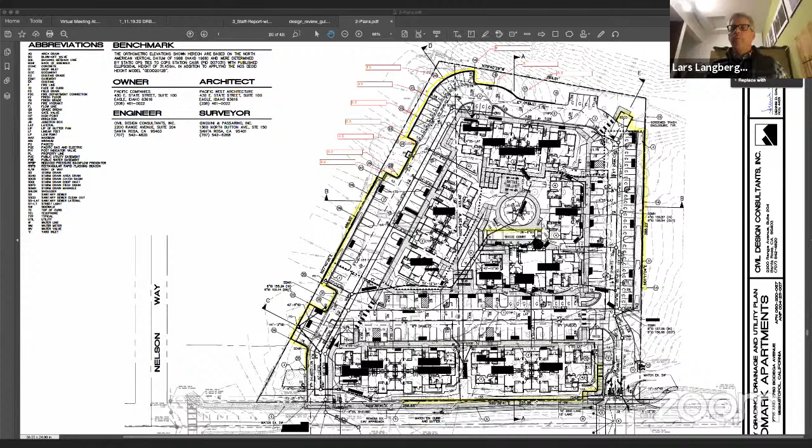Well, right, of course, because the goal of this lot with those goals would be to have people there that could walk and bike to work and shop, and basically live in town and work in town. I mean, that's the ideal. Yep.

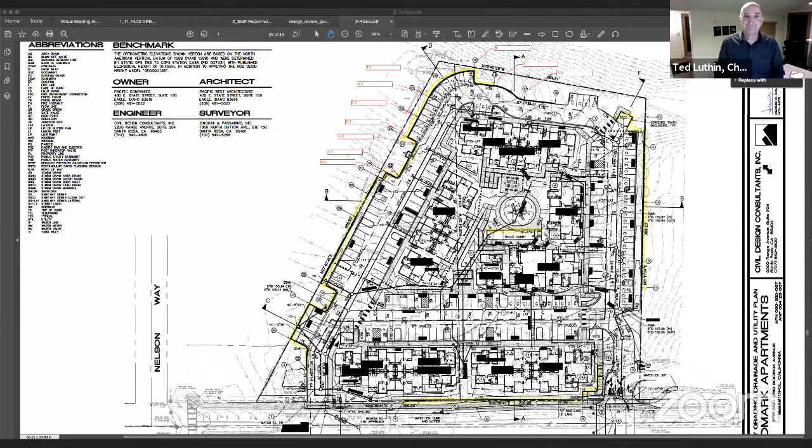Yeah, so there's an argument to be made that it's underparked. I think there's probably an argument to be made that it's overparked. Well, I think the argument is there's too many units, trying to shoehorn too much program onto this piece of property, that has challenges.

And what about our thoughts on traffic, since we're talking about parking? So we've got these two driveways. This one at Robinson is really going to be the main one, and the people in the know are gonna take a right out of here and either head to West County where they work, or go up Nelson Way, work their way through town and head north. I can't envision this being a left in, left out.

I don't think we want that. This might be where, if the traffic consultant is still here, they could talk about what their thoughts were behind that, or if they see any other solutions. There's two buildings along Bodega - if those were separated, is there a way to do something in there, or is that too close to Robinson to get a left in, left out that would allow for that.

Yeah, two left in, two left out. I'm not sure the strategy behind putting it right at the very end where it bumps into a bollard, a median.

Unfortunately, Janice had to exit the meeting. She has 3 kids at home. So I'll certainly take a note, and we can respond to that.

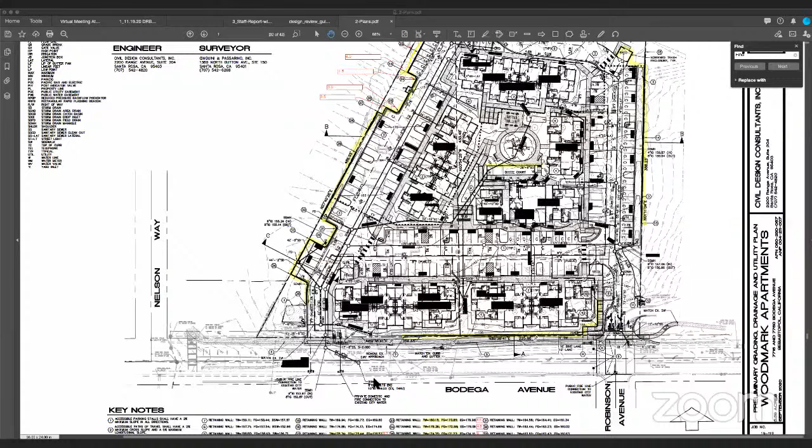At peak hours when people want to make the left, people are going to make the right - median or no median, no matter where that driveway is. I don't think we really even need a traffic engineer. We could use common sense, and anybody will tell you it's going to be worse.

Yeah, I mean, come on. All the studies you do - any common person around here knows it will be worse unless there's some drastic change other than a stoplight, and that's not going to happen. They're talking about actually making them less, with putting bicycle lanes on wider sidewalks. So come on, this is common sense, it has nothing to do with engineering at all.

Yeah, well the reality is bike lanes or sidewalks or not, you've only got 2 lanes. You can't put 3 in there. So it kind of is what it is, and something is going to get developed here, and other empty parcels are going to develop, and underdeveloped properties are going to get replaced with more development. Traffic pressure is going up, and there's nothing we can do about it.

And I'm not sure that this project is really to blame or to be held accountable for increasing traffic in Sebastopol. Traffic is increasing in Sebastopol, and most of it is people that either live west if they're trying to go east, or live east if trying to go west. It's not really related to the people that are going to live here or in the residential neighborhoods around here. It's more pressure from the outside.

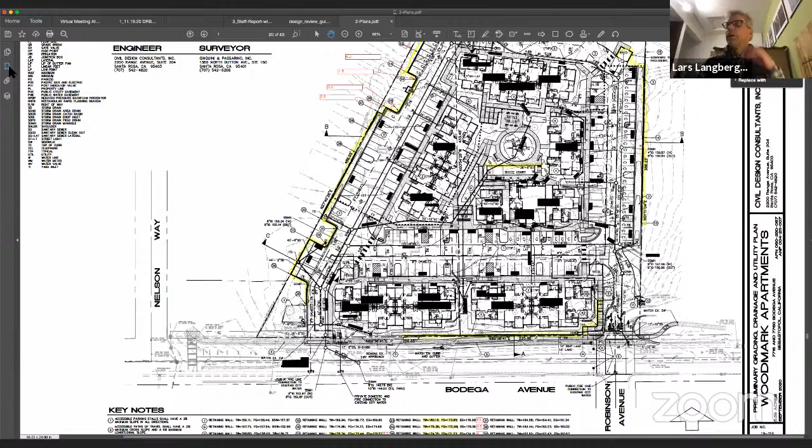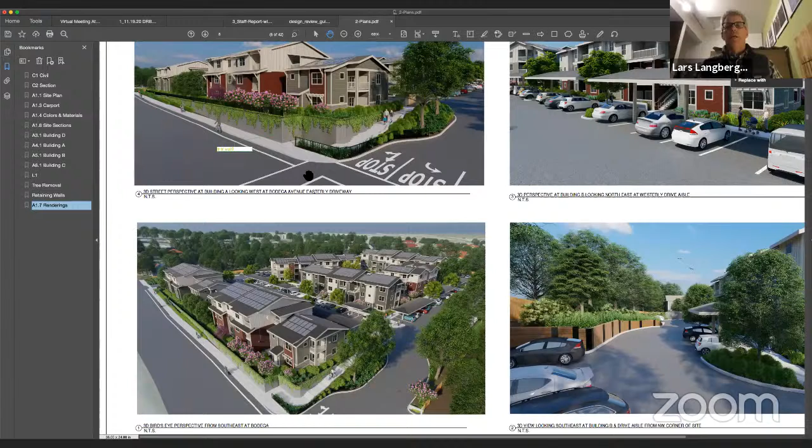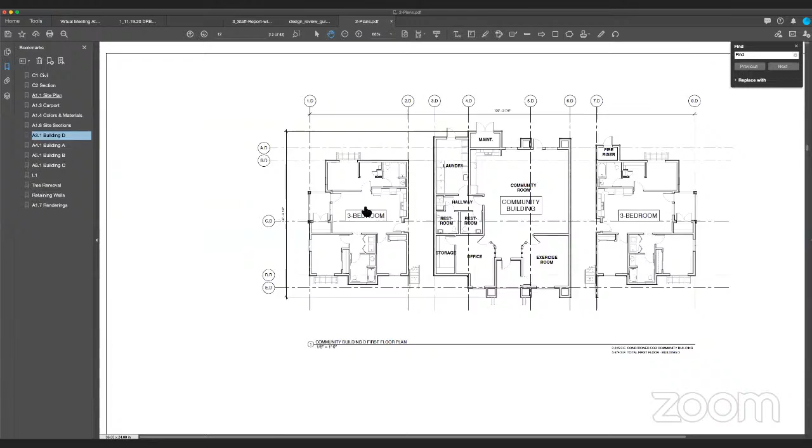Amen. I'll just make one comment, which is that I think this idea of opening up more space is kind of related to my comment, just thinking of the community within this place, and it's not just a series of parking spots where you walk in and go into your house. I think to me, the entries are not very welcoming, but even more so the community room, the main entrance is focused into the parking lot as opposed to the playground and all that area. And it just seems like a missed opportunity that we talked about last time.

I think one of the public brought up the example of co-housing, to think of this as a whole community, make that community room part of the outdoor, an indoor-outdoor community gathering idea is something I'd love to see. I do like that units went on the community building, that it doesn't just have to stand alone, but the entry and the focus of it relate more to the park in that area.

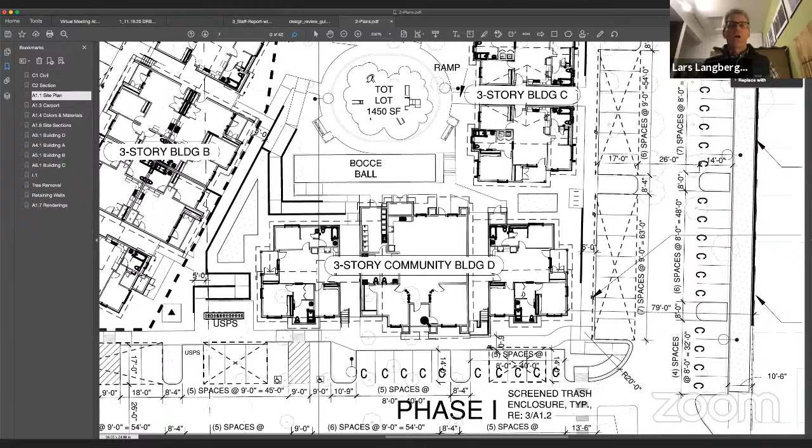Yeah, and I think Petaluma Homes is a good example of that too. The community building opens to the play yard, has big windows and doors, and it's really inviting. Yeah, I think that's my only real comment.

Where is that Petaluma thing you're talking about?

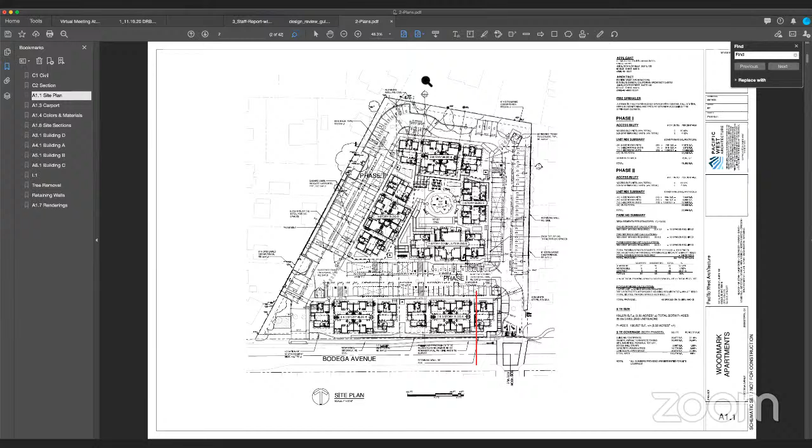I'm trying to pick up where that's at. It's on the corner of Walker and Petaluma, if I may. If you're coming up Petaluma, there's the hospital and a couple of office buildings, and it's right there, kind of behind those office buildings. Those multicolored buildings? Yeah, yep. It's a really nice project, in my opinion. That's an affordable housing site that the city... okay, I'll go up and take a look.

Okay, thank you. Yeah, it's got this staircase. Does anybody know how many units are in that site? Can we not talk about that actually? Okay, just curious.

All right. So I think we've covered everything that's on my list. Does anybody have anything else?

It's dinner time, and if not, I will try to give us a recap. Go for it, if I can possibly do this. So I'm going to start with, since we started with grading—

I think we need to encourage the applicant, like we did before, to look at item E in our design review guidelines: grading should be minimized. I think that reflects a lot of the neighborhood concerns as well about buffers, especially in that northwest corner. I really felt that when I was out there looking at the property line. I couldn't believe the property corner was really in the back of that house, at the very northeastern corner.

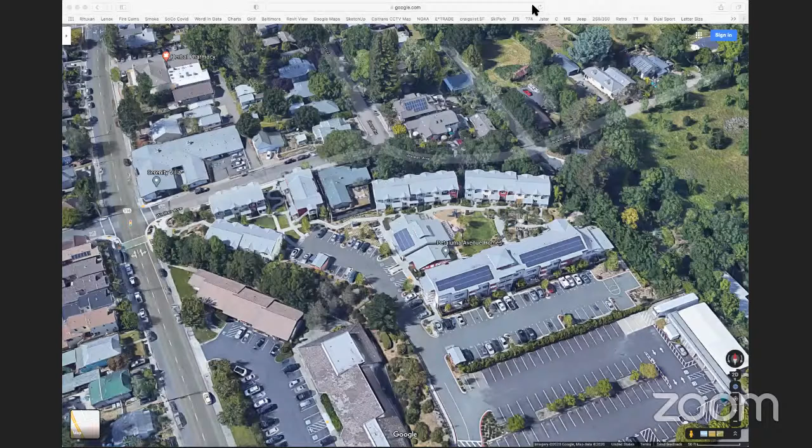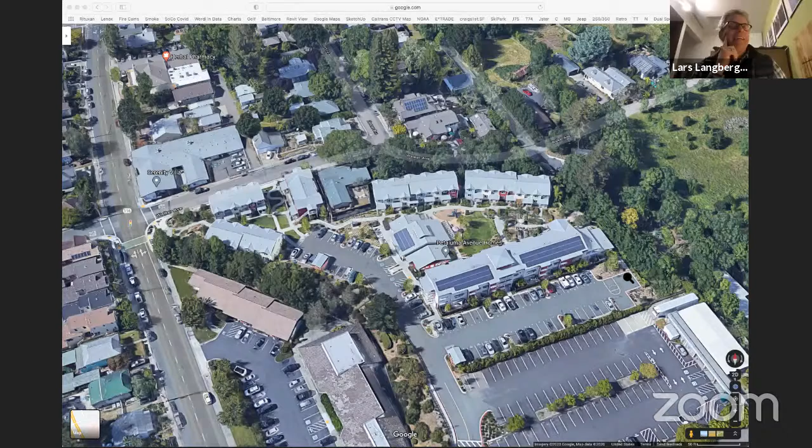Can you just take this picture off, or we could just—which one? So the Petaluma Homes. Oh, am I still on Petaluma Homes? Yeah. Oh sorry, I meant to go back to that. Okay, thank you, sorry about that. I think you hit all the high points. All right.

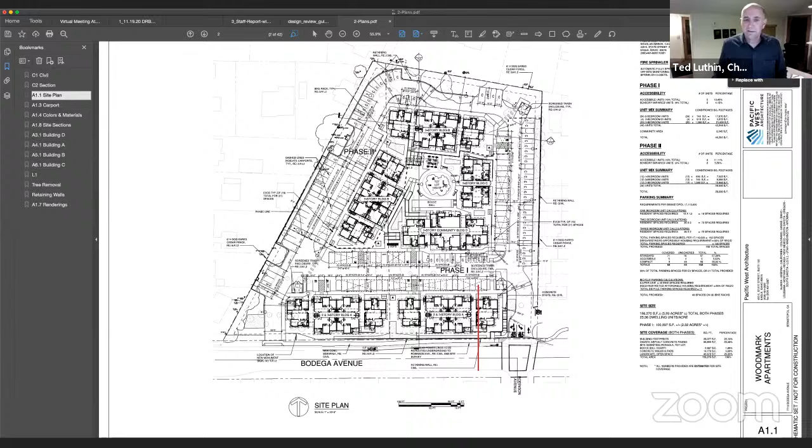Then I think we are probably concluded here. Anybody else has something else to talk about? No.